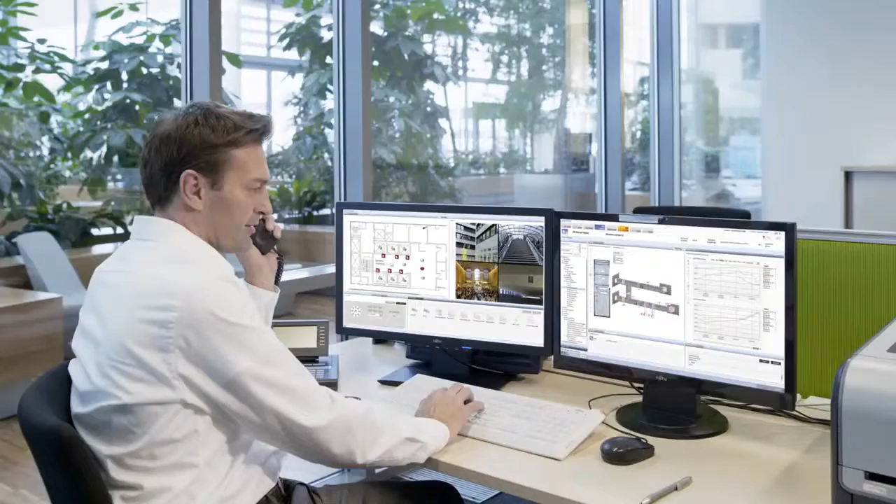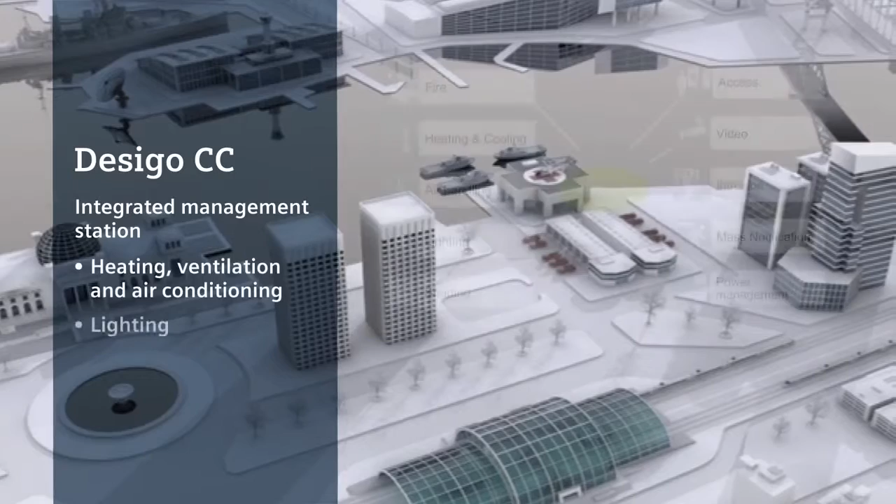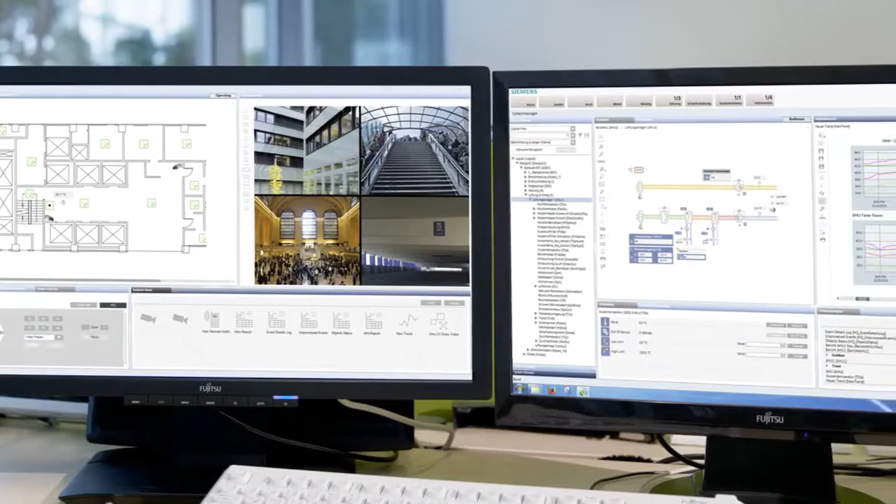Desigo CC is an integrated management station that delivers centralized heating, ventilation, and air conditioning, lighting, shading, power, fire safety, and security. The management station provides a very powerful and efficient way to monitor and control your facilities and ensures maximum protection for people and infrastructure.

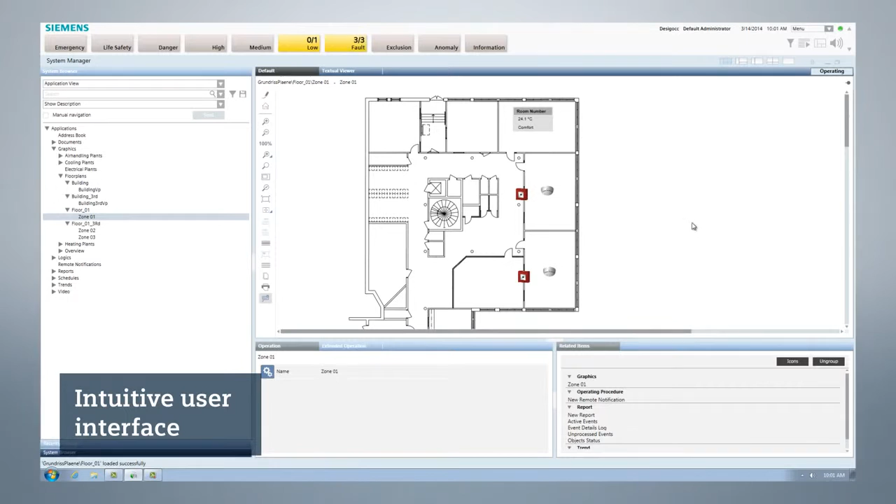Desigo CC gives you an intuitive user interface to coordinate all your building management, fire safety, and security systems from one central platform. Desigo CC can be adapted to your environment and your users to match the way you want to run your facility. Let's take a short tour of the user interface.

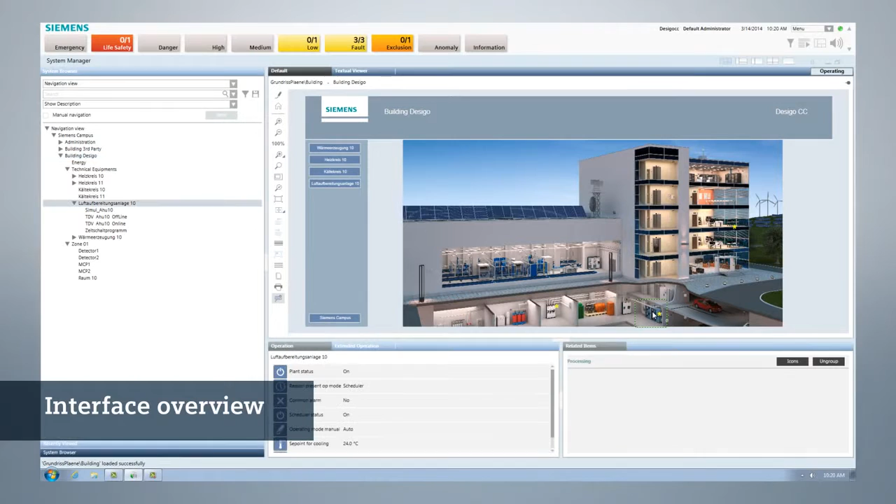Choose the part of the building you need to monitor or control by using its intuitive design and simple navigation. Once the selection is made, its representation is displayed in the primary pane, where it's easier to work with. Next, drill down to get some detailed information. Check performance or make any system changes you need. It's clear, highly graphical, and easy to work with.

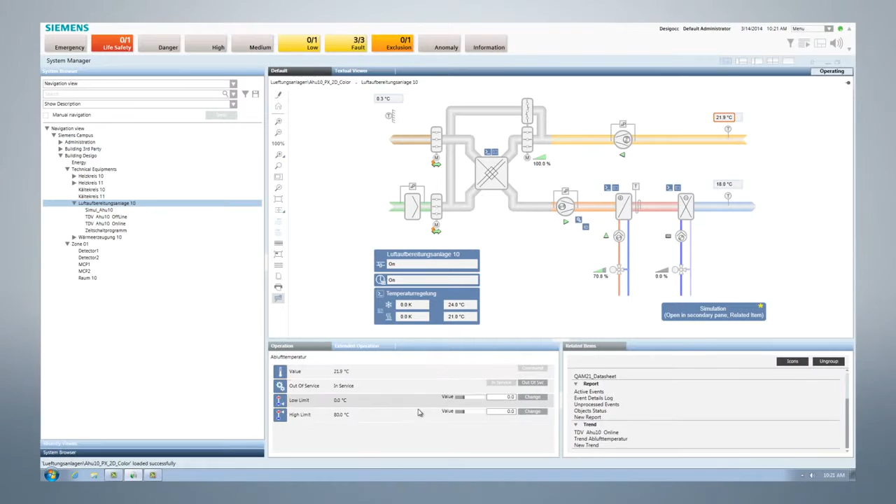The system also provides a list of items that are related to the part of the building you're looking at. By selecting the related items, you can view even more details about the area you are working with, side by side with the initial representation.

The summary bar at the top of the screen provides an overview of the system status with indicators for each type of event monitored by the system. The summary bar is the launching point for managing events as they occur in the facility.

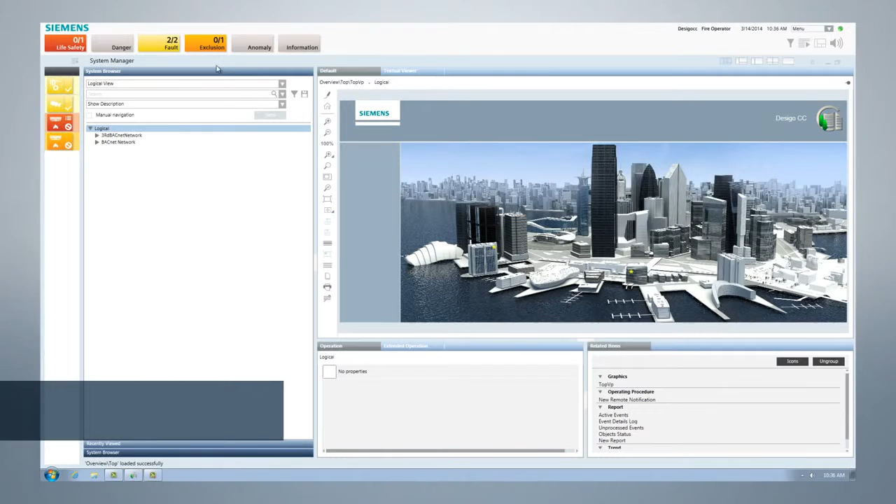Under the summary bar, the main part of the user interface is the System Manager, which is used to navigate, monitor, and control the facility. From the System Manager, you can monitor the current system status, get reports, and change settings, all in real time.

One or more instances of the System Manager can be opened at any time, and you can resize or move each one around, even across separate monitors, for the arrangement that matches your preferred workflow.

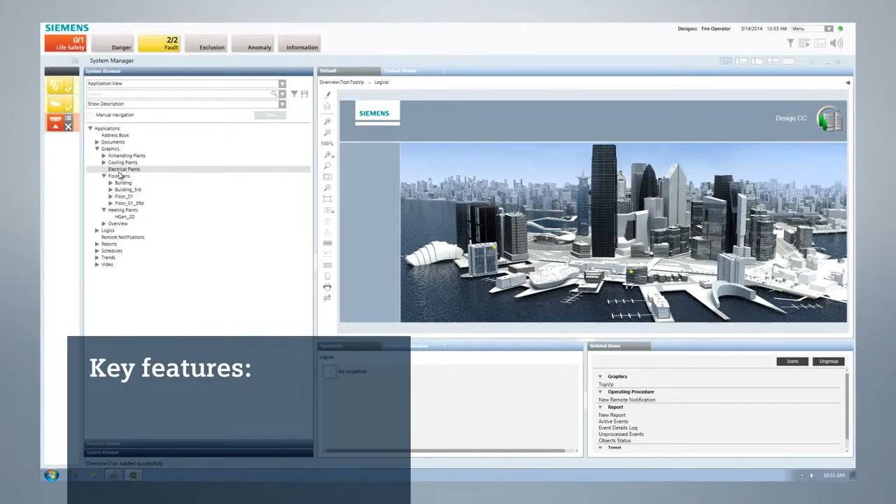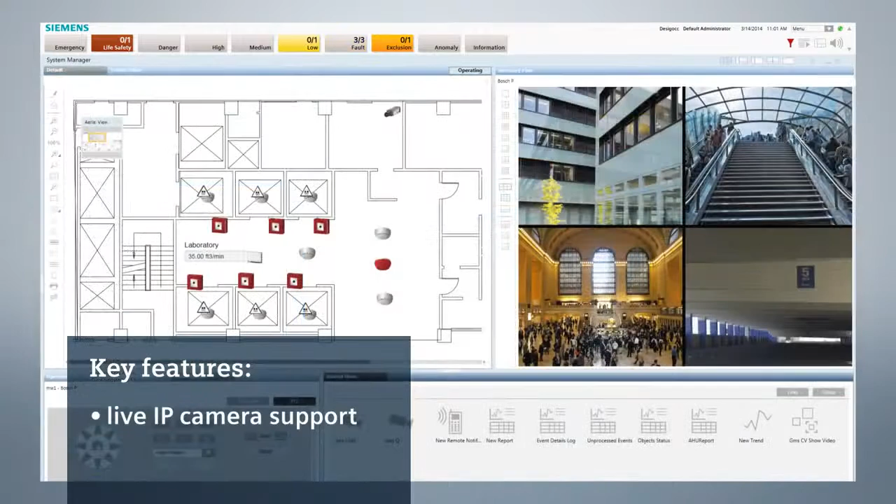Key Desigo CC features include simple navigation through tree views or graphics, drag-and-drop graphics creation, scalable vector graphics, live IP camera support, and powerful event management.

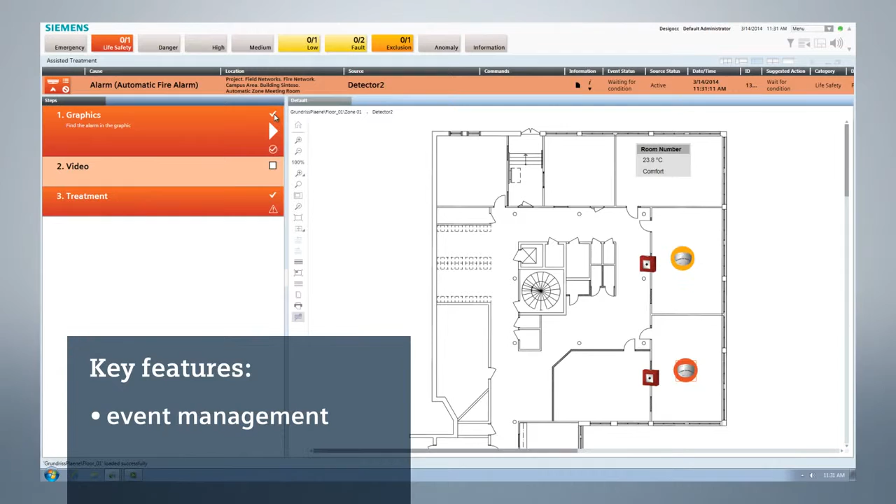In case of an emergency, the operator is informed immediately and guided through the next steps to manage the critical situation. Multiple client options are available for dedicated, browser-based, and Windows desktop app clients, all with the same user interface.

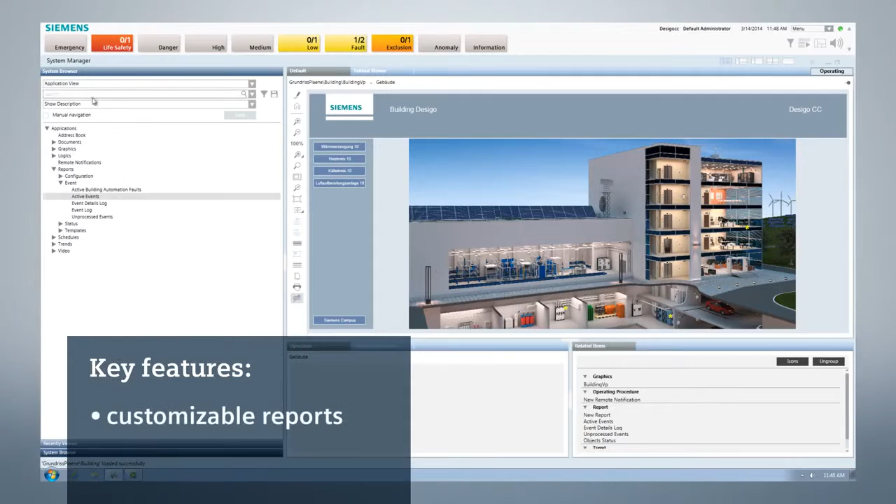Time-shifted trend graphs for quick data comparison. Powerful graphics with AutoCAD integration and endless display options. Customizable reports, including plant graphics and trend charts, and built-in email for remote notification. Desigo CC even anticipates your next step with automatically defined related items.

Desigo CC is UL listed to Fire Safety Standard UL 864, and the system supports leading open standards including BACnet, OPC, ONVIF, and SNMP. Join the thousands of users and building occupants who rely on Desigo CC to monitor and control their facilities and to ensure maximum protection for their people and infrastructure.